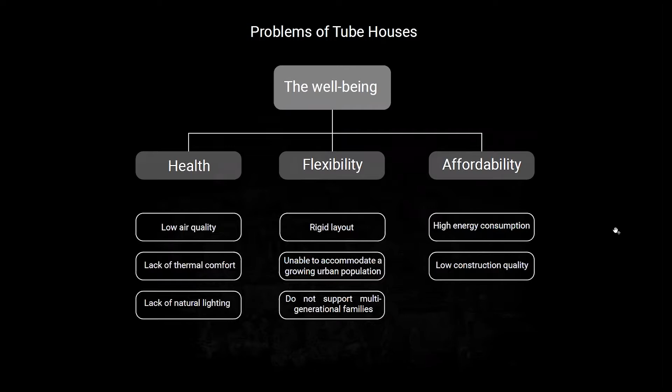Although these homes are an important part of Vietnam's culture and economy, they compromise people's well-being. This issue, broken down into health, flexibility, and affordability, limits the tube houses from being economically and structurally long-lasting. Today, tube houses respond to current market demands, but at the cost of long-term environmental and cultural degradation.

Tube houses still hold important environmental and cultural values, and their current misfits with Vietnamese climate and traditional family structure can be corrected without compromising contemporary expectations of urban living.

Reinventing tube houses would leave them capable of integrating the past and the future in the form of cultural tradition and long-term economic and environmental sustainability.

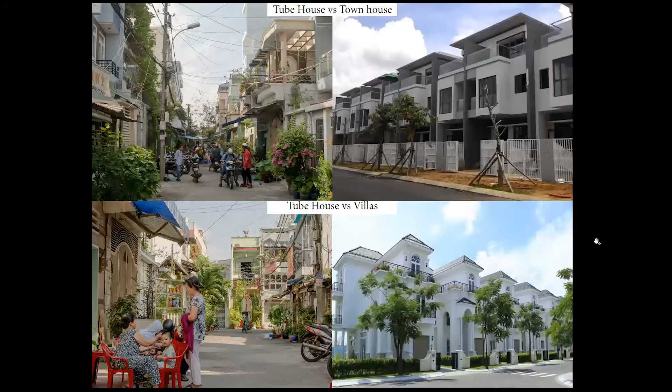For example, tube houses contain a prominent cultural aspect by bringing a vibrant urban atmosphere in comparison to the cookie-cutter stereotypical structure of townhouses and villas.

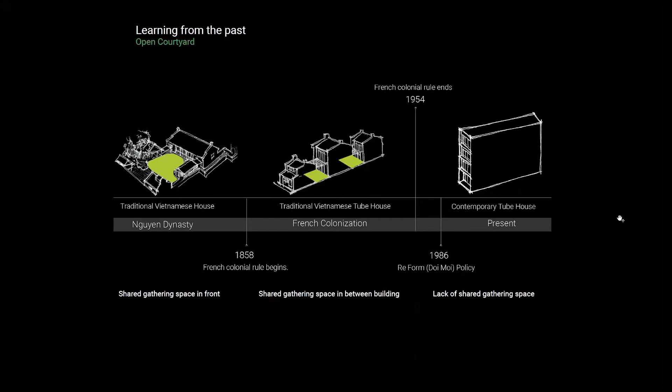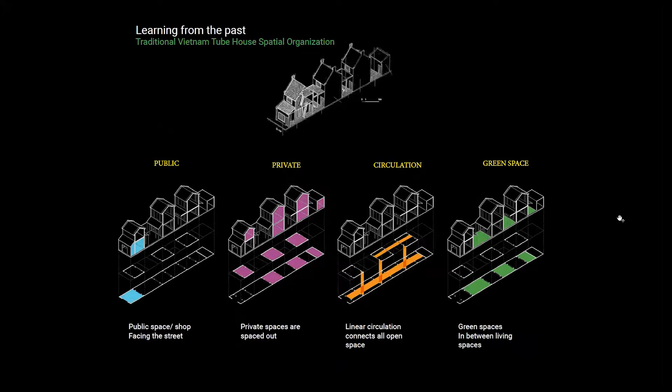The first method is to learn from the past and history. Vietnam's housing typology evolution is highlighted primarily through the placement and shape of the courtyard. Traditional tube houses evolved from the initial pattern brought through French colonization. Concepts of openness, natural lighting, and ventilation are highlighted through its courtyards.

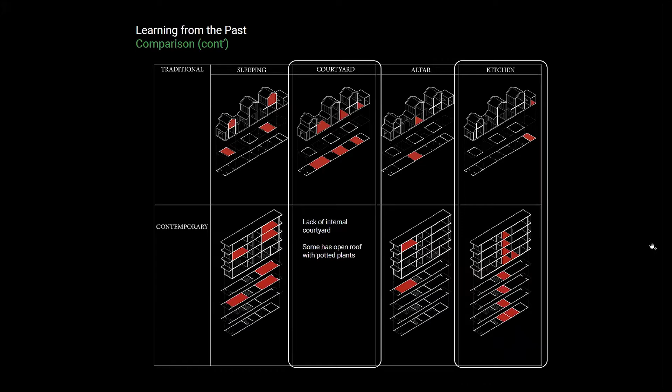Contemporary tube houses have then emerged, placing the kitchen and bathroom within the building, which does not allow natural ventilation. This concept of the traditional tube house can be applied and advanced within current Vietnamese architecture.

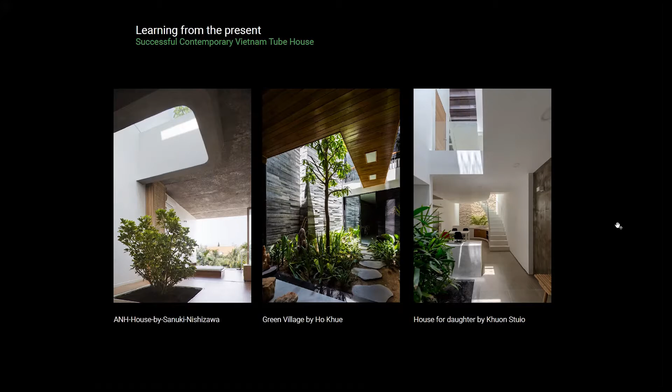Precedent studies bring modern influences to developing a design language, in continuation of improving indoor air quality, thermal comfort, reducing energy consumption, and supporting the Vietnamese family structure and urban order. These studies analyze forms of housing that were successful in those areas, in ways to advocate for creating healthy indoor environments.

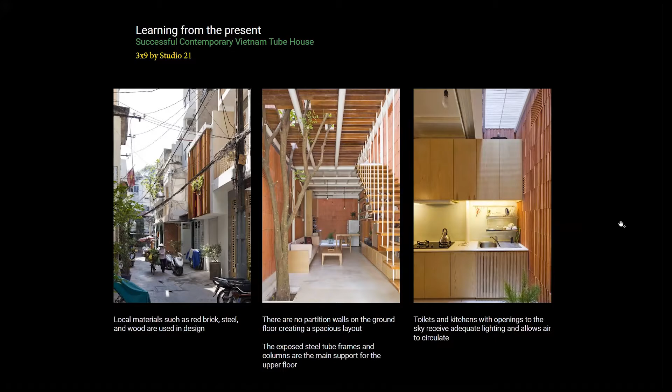Tube houses can incorporate natural lighting, ventilation, and green facades. These concepts are further extracted and compiled to create a design language catered for those housing types.

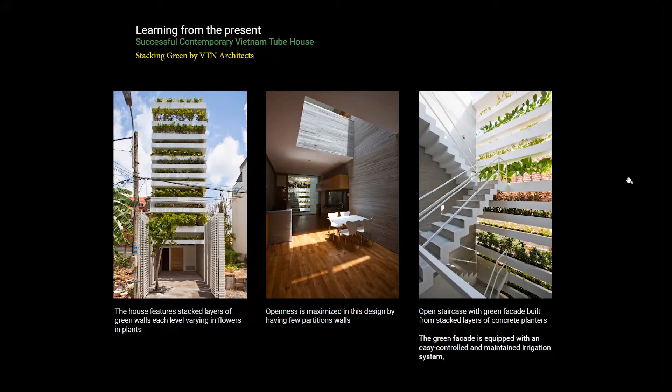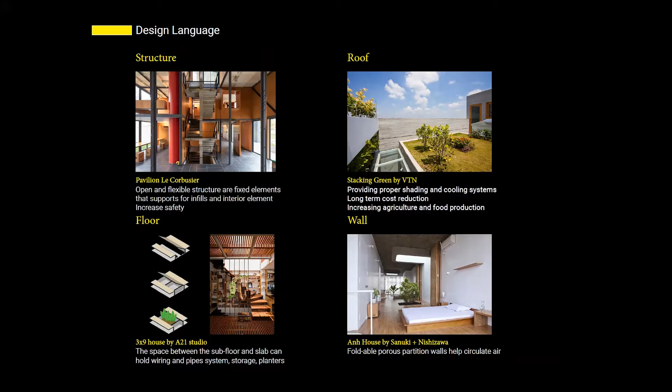Designs such as Stacking Green by VTN Architects utilize green facades as a means of air filtration as well as increasing thermal comfort. Key aspects taken from successful modern tube house designs are then strung together to create the design language. This language is broken down into structure, roof, floor, walls, stairs, indoor gardens, stack openings, and balcony facades.

In this, design principles are then formed with goals aimed toward flexibility, sustainability, and affordability. Flexible designs include adaptive spatial and structural systems and develop strong cultural identities.

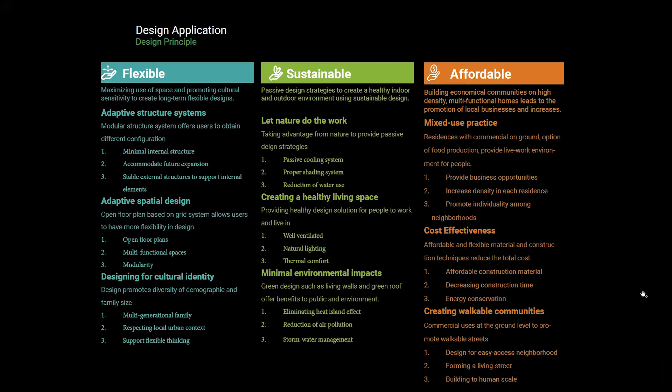Paired with sustainability, this can be done by incorporating designs into nature and creating a healthy living space with minimal environmental impacts. Finally, affordability will also make these accessible to a larger population through mixed-use practices, cost effectiveness, and the creation of walkable communities.

Design guidelines, values, and concepts developed through the design language are applied to the guidelines, a tangible and working function that will help those designing and developing tube houses. The design principles are translated into four main systems, creating the guidelines, which are spatial system, envelope system, structural system, and infill system.

The spatial system is broken down by conditions, and then the modular arrangement of each room, offering optimal consideration of airflow and thermal comfort.

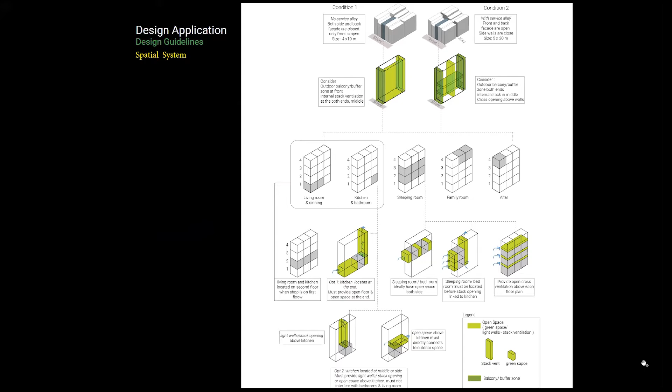The envelope system is defined by the front facade and the roof system. Type of shading and materials are then determined based on the circumstances, for example, the typical facade in comparison to the green facade.

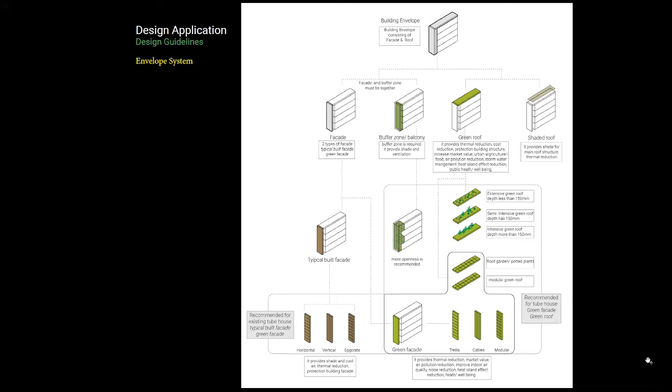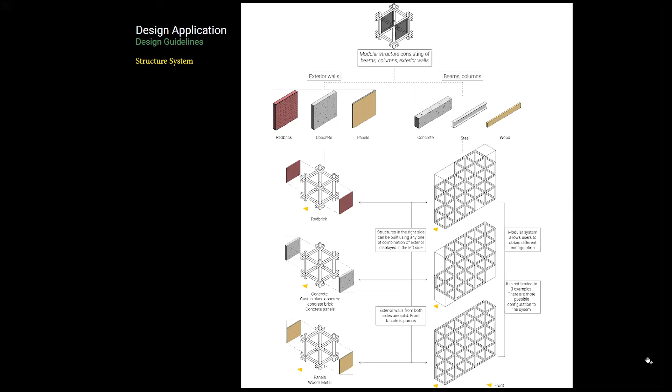Structural system, made of exterior walls and beams and columns, allows for any combination of materials to be used in conjunction with any modular design systems.

Infill systems are divided into interiors, walls, furniture and appliances, and flooring. It emphasizes modular and multi-purpose systems, which in turn supports flexible designs.

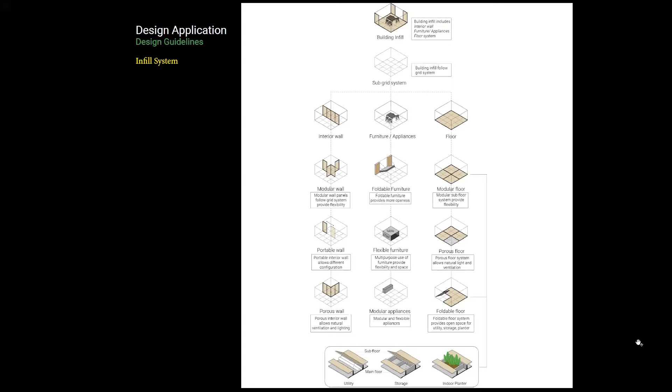The application of these guidelines to conditions will apply to most tube houses. Different conditions show extremes highlighting the purpose of the design language and guidelines. Condition 1 does not contain the service alley, whereas condition 2 does. These configurations give examples for the user in how to apply the guidelines.

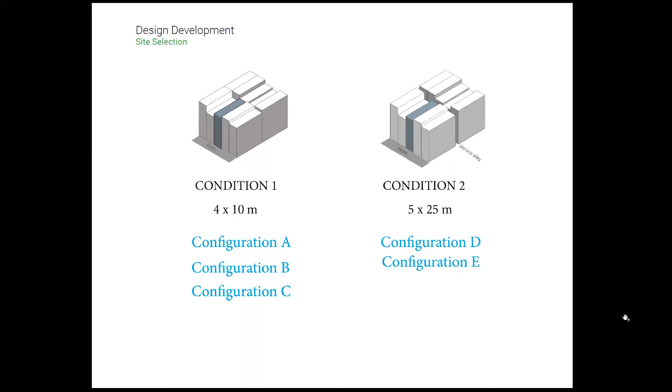The configuration implements each system into the tube house design and how it contributes to a healthy environment for occupants. Configuration A uses a stack opening in the middle with a typical built trellis shading for the roof and the front facade.

Configuration B uses a middle stack opening but a different floor plan and shading options, for example, fabric shading on the roof and vegetated shading for the facade.

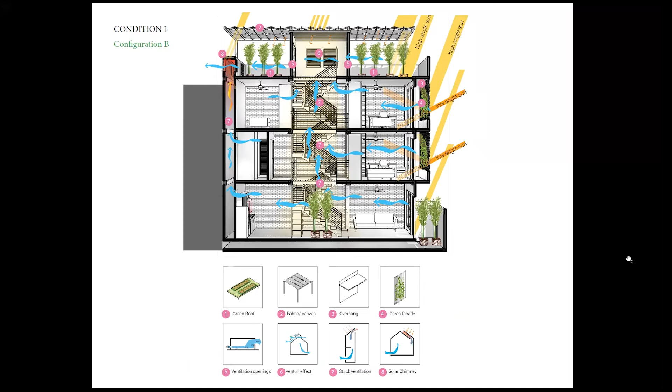Configuration C has a stack opening located toward the back and uses plants for both roof and front facade shading.

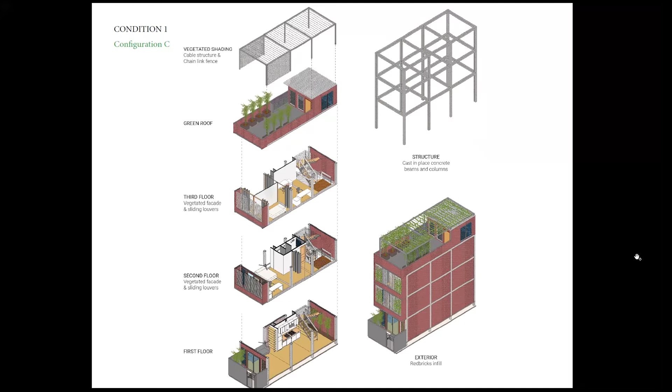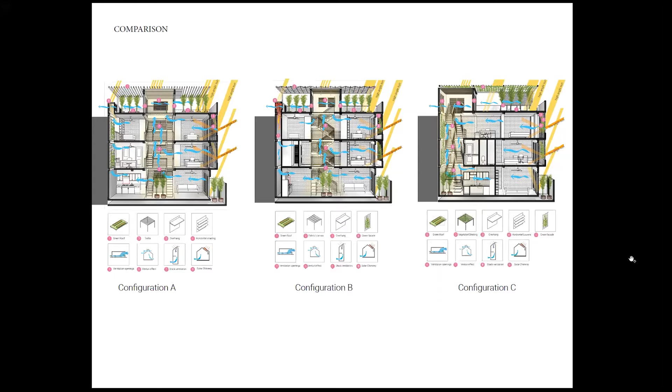Each of these configurations apply Venturi effect and stack ventilation principles, but differ in floor plans. The optimal shading strategies use vegetation for both roof and facades.

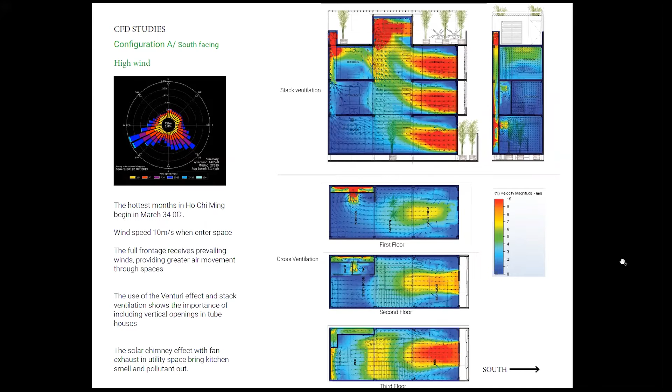CFD studies show the greater benefits of stack ventilation versus cross ventilation in this particular condition. In high wind conditions, full frontage receives prevailing winds, providing greater air movement. The importance of this vertical stack opening is displayed in high wind conditions.

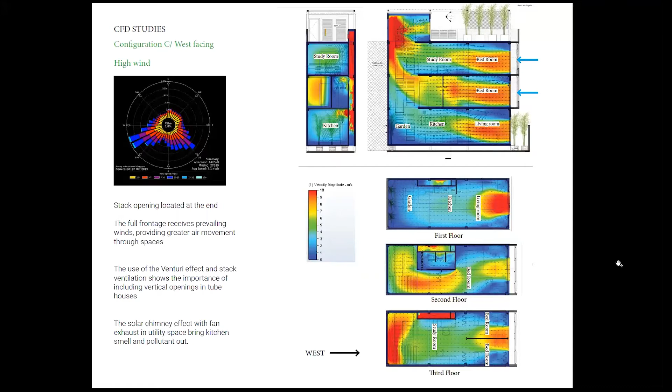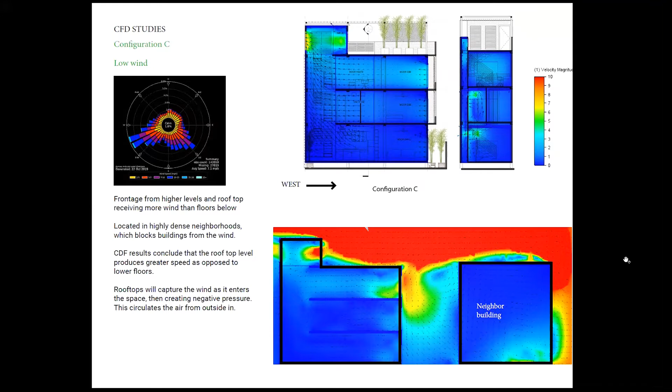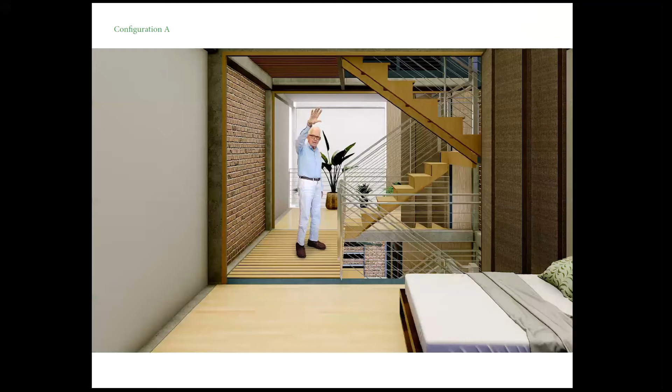This render shows configuration A layout with the kitchen located toward the back on the side of the building. Sleeping room and family room are located on the second floor. Open floor plans allow natural lighting and ventilation.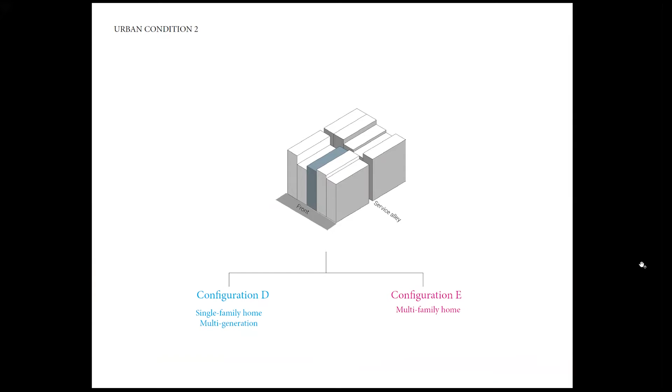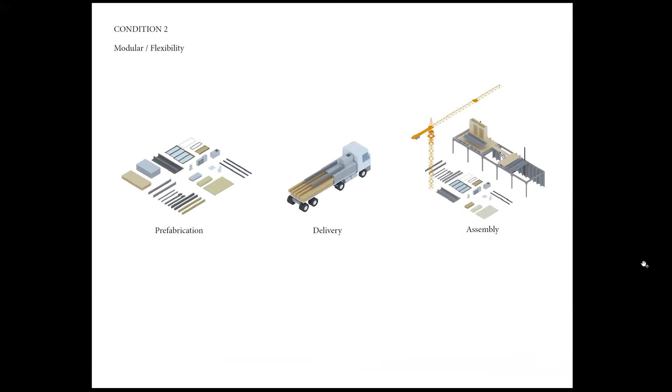Urban condition 2 with service alley in the back has two configurations, D and E. Condition 2 primarily focuses on modular design and prefabricated process, where units can be assembled at the site. Both configurations use precast concrete at the bottom and steel frame at the top. Toilets, appliances, furniture, floors, and walls are modular.

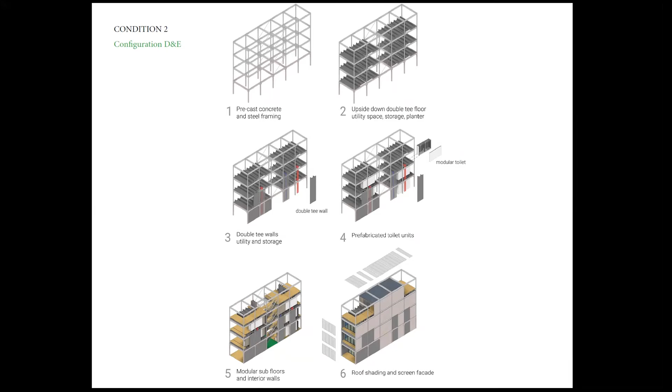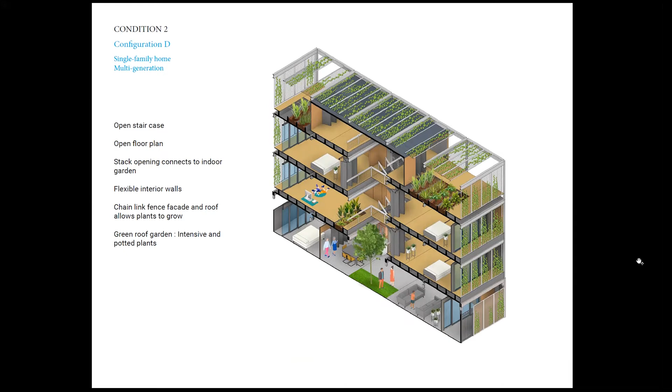Configuration D is a single family home that is multi-generational. This configuration contains services and utilities condensed to one side of the building, creating an open floor plan from one end to the other end of the house.

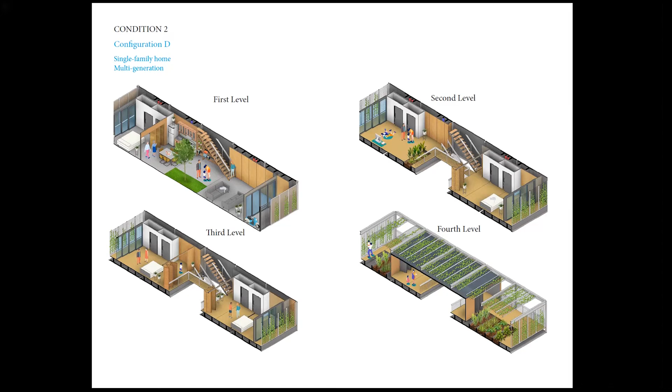The first floor has ADA unit and a living room, while the second and third floors have bedrooms and family rooms. A green roof is located on the fourth floor. Green facade and green trellis wrap around the building along with the indoor garden, protecting and creating a healthy indoor environment for occupants.

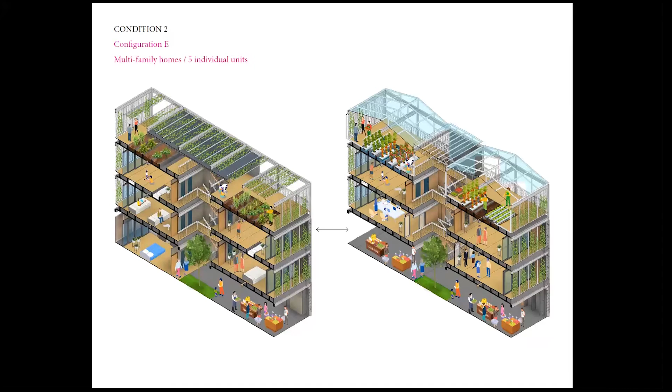Configuration E contains 5 different individual units, highlighting the flexibility of the structure, containing living space and office space, with a green roof providing urban agriculture. The first level can be used as an open market.

The second level is living space. The design highlights the use of an upside-down double tee to create a storage space, further contributing to an open floor plan.

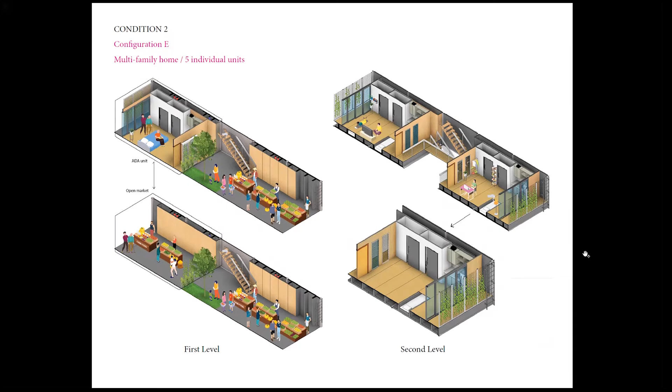The third level can be rented out and used as a co-working environment, for example office and commercial space. The green roof garden provides space for food production, which can then be sold at the ground floor.

Overall design strategies implement sustainable practices through the use of green facades, hydroponic farming, indoor gardens, and green walls. This also includes mixed-use practices as well as walkable communities, seen in commercial and office spaces and community gardens.

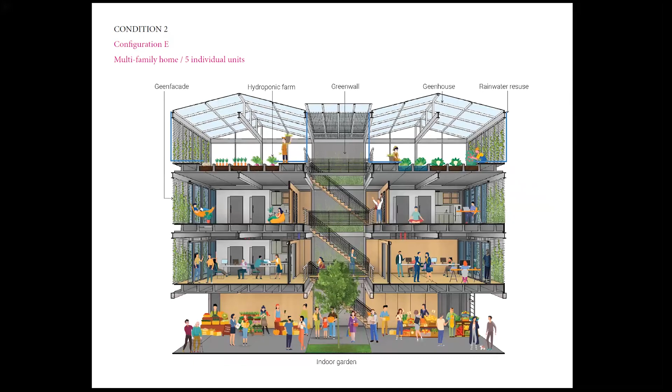CFD studies for configurations D and E show that cross ventilation is most effective when the service alley is in the back, providing an open path for wind flow. These studies prove that the open floor plan contributes to increased natural ventilation and an overall healthy building environment.

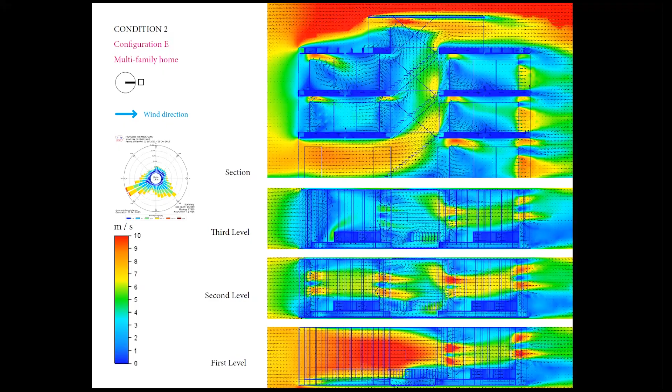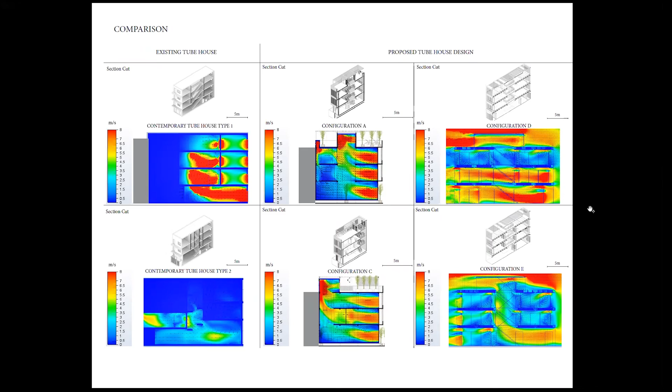The comparison shows that existing tube house designs lack natural ventilation, versus the proposed tube house designs with vertical stack openings.

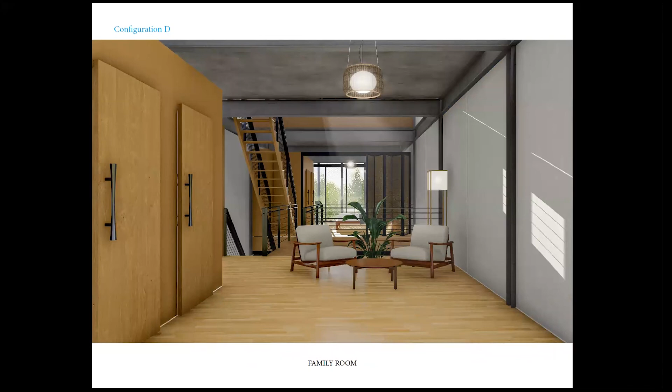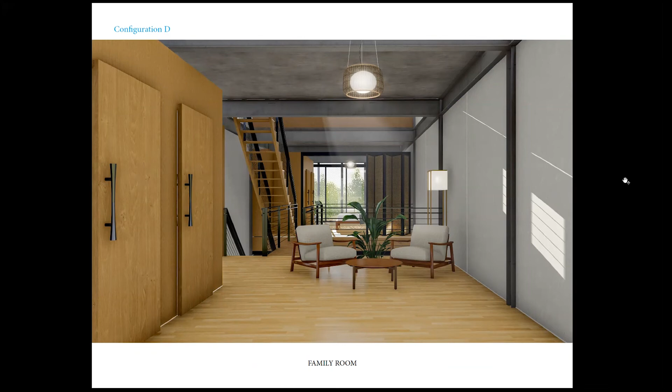Configuration D, second level, standing at the family room, looking toward the bedroom at the end, with open floor plans, foldable partition walls, open staircase, indoor plants, and importantly the stack opening located in the middle, providing natural lighting and ventilation.

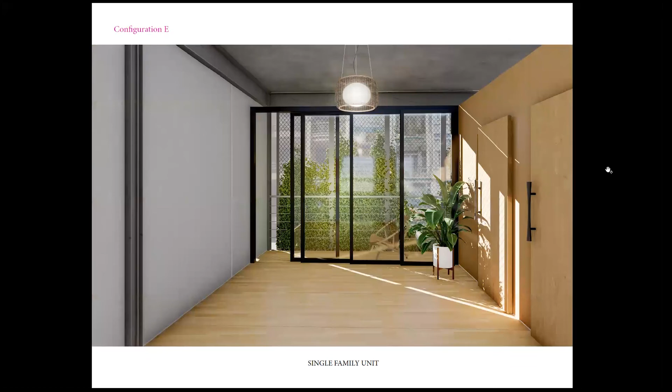This rendering shows configuration E, a single family unit, looking toward the green facades at the end, with a storage system on the ground floor offering open floor plans.

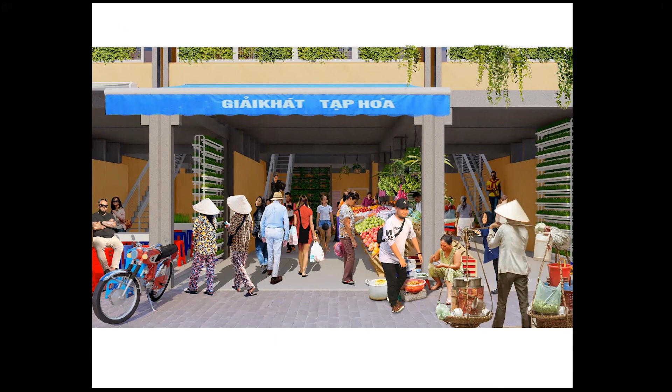Future tube houses have the potential to incorporate flexible, affordable, and sustainable design concepts. This can be broken down into guidelines applying to most tube houses throughout Vietnam.